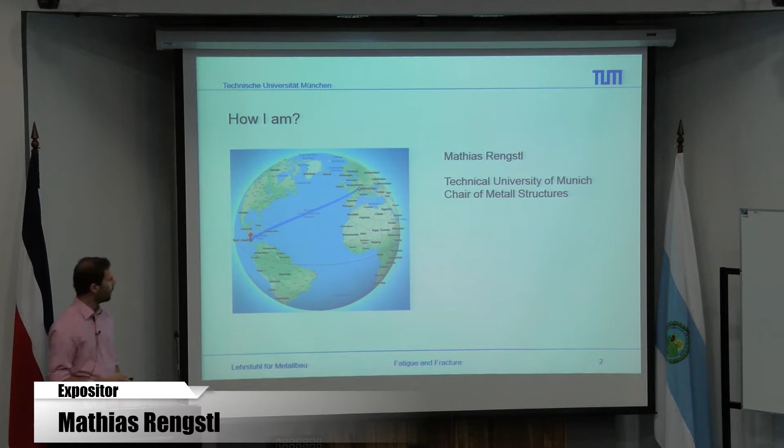So I had a short trip behind me. And also thank you for having me here and arranging this program, and to do a little bit more on this topic. So this is our chair of metal structures. This is our professor Martin Mensinger, who allowed me to come here. And just to give a short overview of our topics, what we are doing at our department or our chair is...

At first there are some guys who are working on blast analysis, so just design and numerical simulations, no experimental investigations. Then we have a topic on the buckling analysis of bridge girders and composite structures under fire loading, fatigue analysis of joints with aluminum alloys and steel, and also fracture analysis of steel, especially here for rail systems. Regarding the railways, if they're going brittle in summer or winter or in spring, so to enhance the system and the durability of the railway system in Germany.

So what I will do the next days is, as I talked to Esteban, we are doing in the morning some introduction always to one topic, more theoretical. And in the second session, I would go for an example, and there I would work on this example. So for today, we have the topic Introduction to Fatigue Analysis.

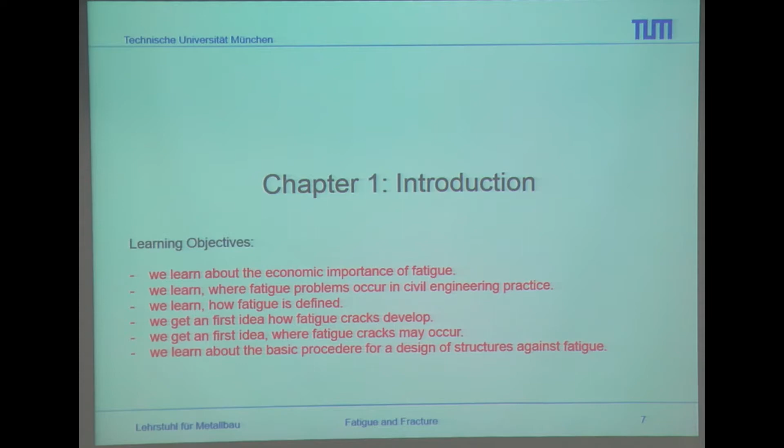Then we learn about the fatigue problems which occur in civil engineering practice. Then also how fatigue is defined. So what are the specific parameters, what are the specific names we have to learn, and what are the first ideas for the fatigue crack occurrence, and also some basic procedure for design of structures against fatigue.

So, so what does fatigue mean?

So fatigue is always referred to a time series, a stress time series, which is quite variable. In basic assumptions, as in testing, we always go there with a sinus, but reality always has something like this. So we have here a strain or a stress, and this stress or strain varies during time.

Due to the fatigue, the material loses resistance due to the frequently changing load. Therefore, we have relevant fatigue stresses - they are somehow the peaks from here to here, defined by the range of the stress and the number of cycles.

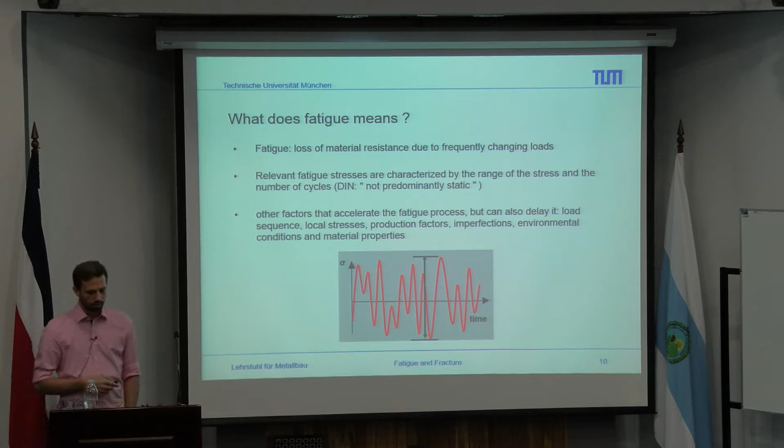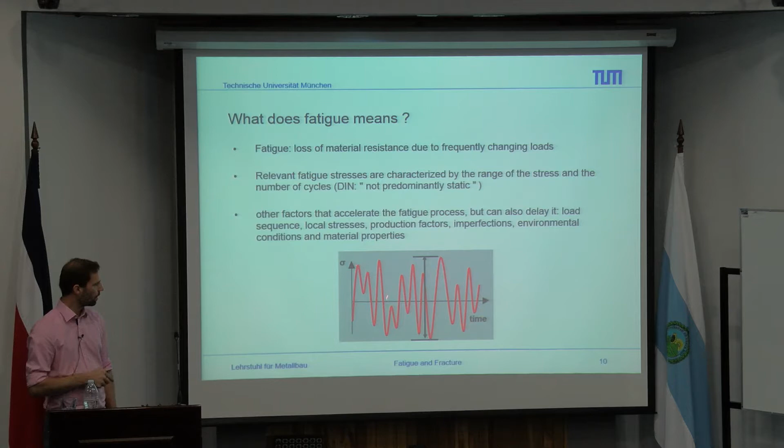There are some parameters or environmental effects which can also act on our fatigue behavior, such as the load sequence - do we have some high peak and some low peak, and again some high peak, and afterwards some low and high and low peak. Due to the arrangement of the high peaks and the lower peaks, there can be some effects on the material, and also on the local stresses.

So how is the constructive design of the structure? How is the building or the structure designed? Then also some production factors which are more related to welded parts and screws and so on. And then the next part, which we as engineers usually do not have in mind, are the imperfections.

Usually we always talk about some idealized beams and plate systems, but due to some second order stress effects from the welded part or the joints, we have there some influences due to the imperfections. And then also the environmental conditions and material properties.

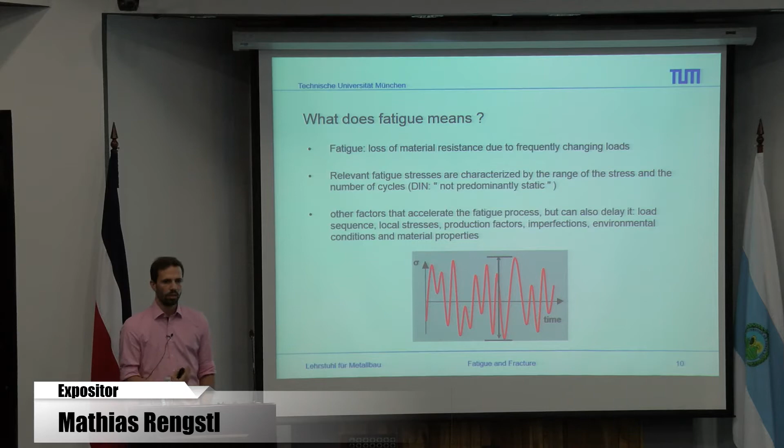Usually in fatigue analysis regarding civil engineering, in European standard we say that we do not work in the maritime area, because due to the salty water there is much more corrosion, and therefore you have to conduct more specific testing, which is usually not important for civil engineering structures in this case.

The fatigue history in Europe: the first observed documentation of fatigue damages was by William Albert in 1829. So now we have around 180 years of knowing this effect.

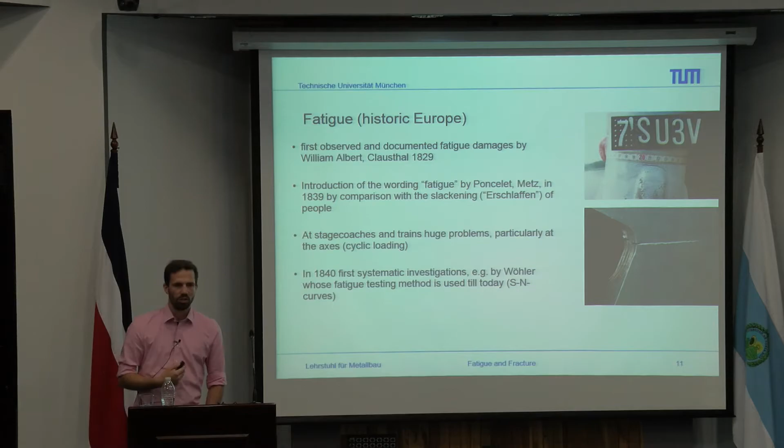Around 10 years later, by Poncelet, Metz, the word fatigue was established, and he established it due to the behavior of persons - if a person is getting tired, he also has some fatigue problem. So he mentioned that the material gets tired too, and established the word fatigue in this situation.

At this time in Europe we had the Industrial Revolution, and a lot of train systems were established. Due to this, the first real problems appeared at trains, particularly on the axes - the axes always rotate, the train system is not perfectly straight, and so you get a lot of different cyclic loading. Due to this, the first real problems appeared.

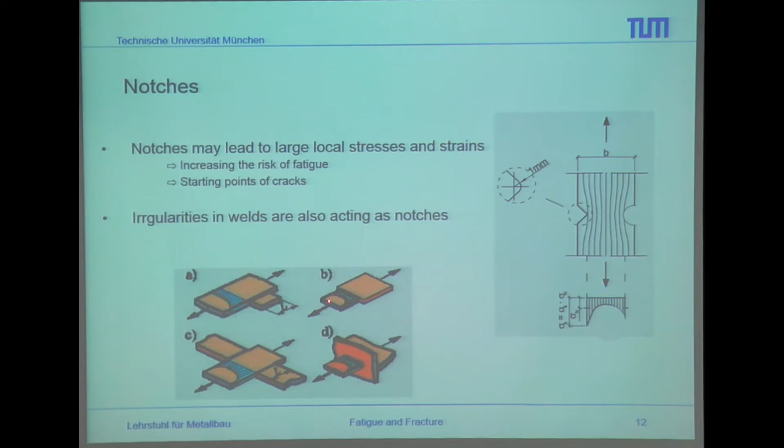The next one is a smooth tension bar, where we join different bars with different thicknesses. We have an increase of stresses from this point to this point, and due to this, the stresses at this point are also increasing, so we get crack occurrence and eventually our structure fails.

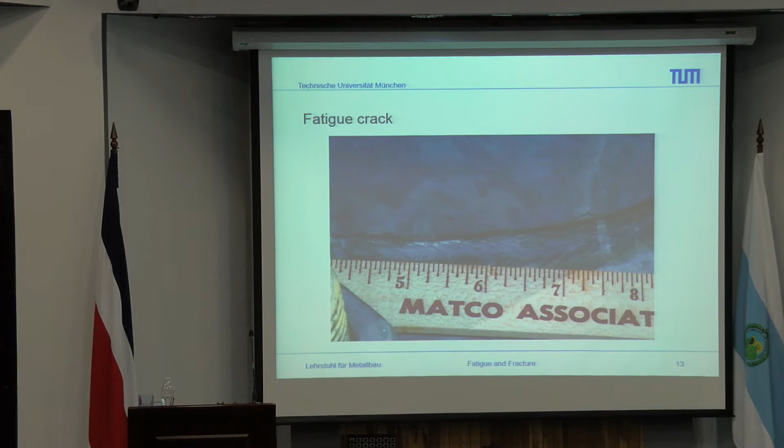So how does it look like? This, for example, is a section which looks like this, some hollow section, and we are now looking at these points, and here our fracture occurs.

Here we can see that due to our welded part, at the root and weld toe of our weld seam, we have crack occurrence, also due to the notches here. As we can see, the weld seam itself is not really large, but we can already see our cracks here.

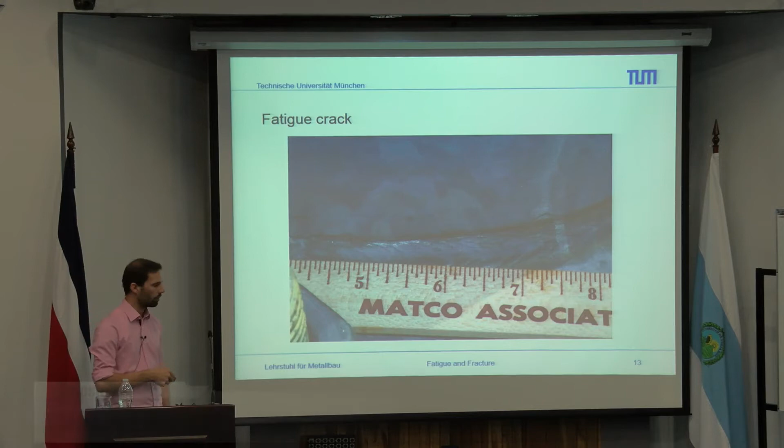This is something which can be tested with NDT testing procedures. At the end, you can already see such a crack of a size of 0.5 millimeters if you are really looking at the right positions, so you already can see where a crack might be, and how large the crack can be.

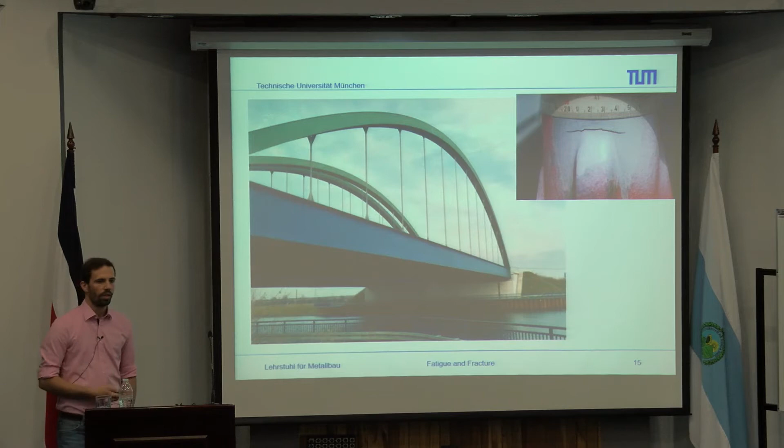So what are some specific parameters in a welded construction? Here we talk about weld imperfections, but we also have to divide between weld imperfections inside the weld and weld imperfections acting on the joint.

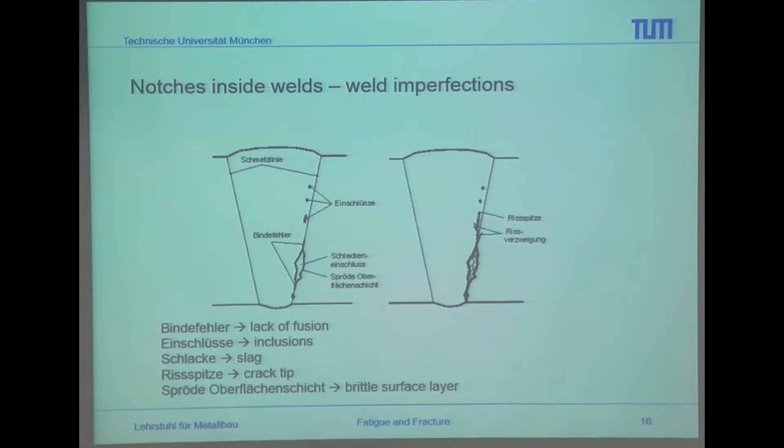Weld imperfections acting on the joint as a stress increase would be a misalignment, like angular or axial misalignment. So this means we have a joint, and this would be an axial misalignment, and this would be an angular misalignment.

I'm going to go specifically into these two effects tomorrow. But today, at first, we just look inside the material, so we are talking about the notches inside the welds and also the weld imperfections.

Here you have a short drawing. This is, for example, a butt weld, and there are some effects which I have named both in German and in English, due to the lecture being given in German. We have at this point a lack of fusion, so as you can see, there is a loss of material, meaning there is no joint between the base material and the weld material.

The next one is some inclusions, called Einschlüsse in German. The inclusions are some material which is in a really bad condition, which may occur due to the welding process, due to some bad welding parts. The next one is also the slags, which can also appear next to the lack of fusion.

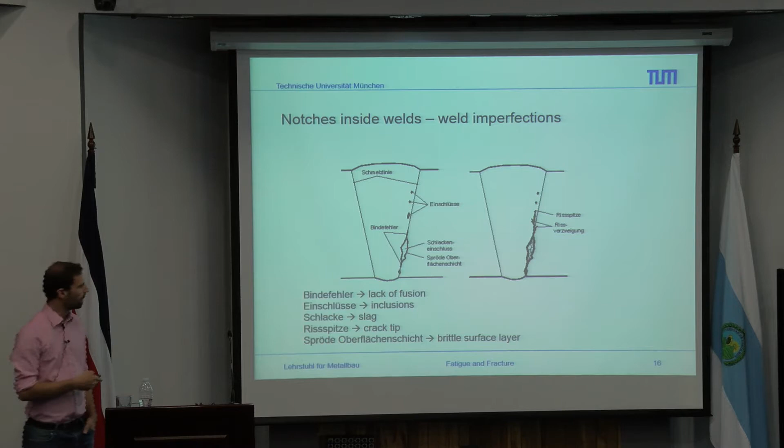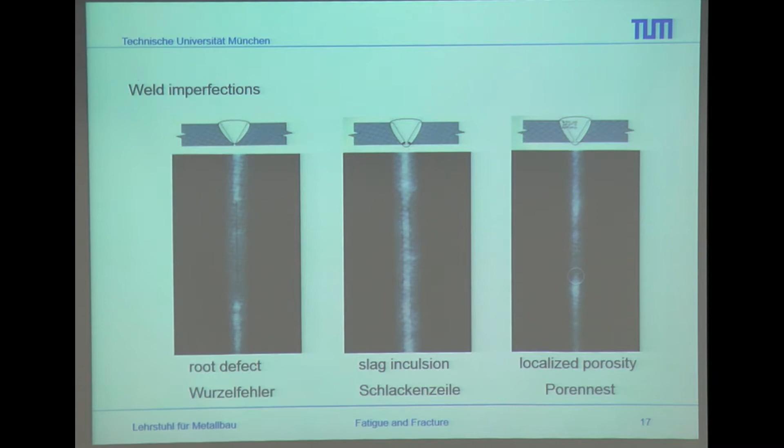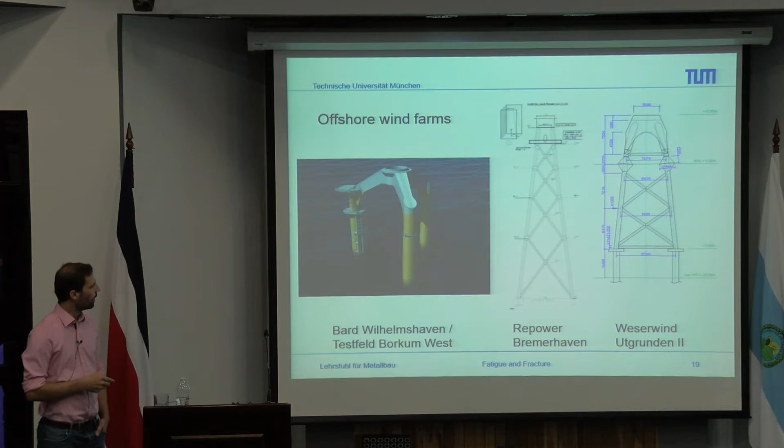So where can it appear? Just some introduction again, what are we talking about. In wind farms or offshore wind farms, we have a high amount of cyclic loading due to the wind turbine. It is rotating, the wind has some turbulences, and also the water is rough, so at the end we have a lot of cyclic loading which is really changing a lot. Due to this, here we have some analysis we have to do. There are just some drawings of how it looks like and how such an analysis is done in the industry.

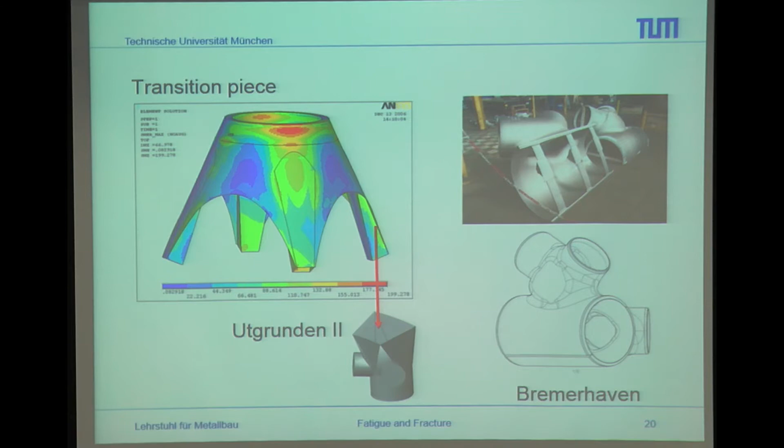So here we have the top point, which is this part here. This part is analyzed by a 3D model, and at the end you're gonna see how much loaded your static design is, but also your static fatigue design. This is also something I'm gonna go into in more detail tomorrow.

So which stages of fatigue processes can appear? The fatigue process usually involves crack initiation, crack growth, and residual fracture - these are the three main parts. The crack initiation is usually caused by structural changes of damages exclusively on microscale, so here we're really talking about microscale material defects and so on.

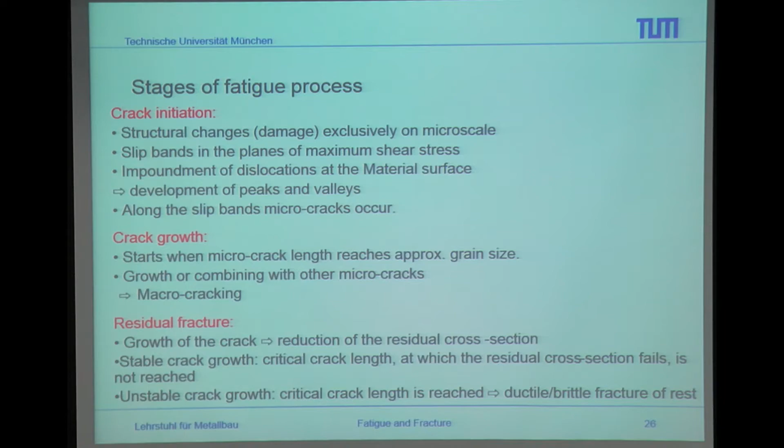And the next one is the slip bands, which occur mostly in the planes of the maximum shear stresses. This is something, if you're testing steel bars in a laboratory tension test, you can also see the slip bands. And also the accumulation of dislocations at the material surface, so the development of peaks and valleys, and along the slip band, micro cracks occur.

So here you can see you have some defects in the micro scale area, and due to the loading which occurs to the slip band, also the deformation starts, and this deformation is where the micro crack starts - this is the initiation of the crack.

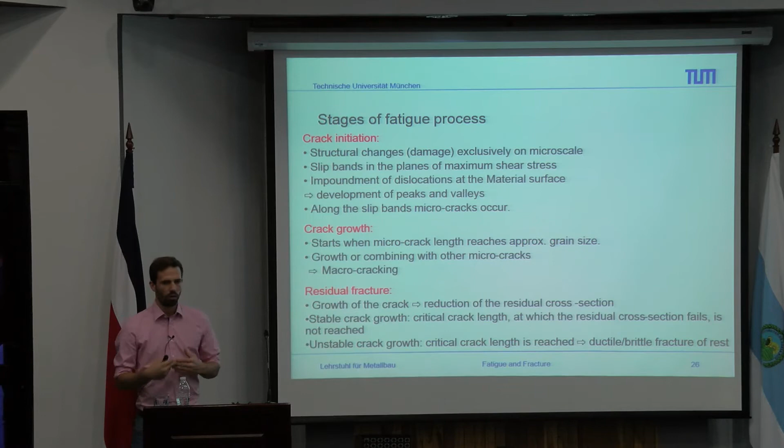Then our crack starts to grow when the microcrack reaches distances approximately the grain size. Due to the materials, you usually have different grain sizes, so at this level you cannot say exactly where the crack growth starts.

Usually you say you're talking about long cracks if the crack has a distance of 0.2 millimeters, 0.5 millimeters, because then you can also see this crack in the inspection. But before that, there's no way to see it, and so this level is somehow related to the crack size or the size of the grains, because then the first slip between the grains is broken or already cracked, and the crack growth has started.

At this level, you have the first grains which are broken, and at the end some different cracks may combine with other microcracks and then grow into a macrocrack. The macrocrack is, as I said before, at the end the long crack, which you can obviously see in some inspection, and at that level you can go for some enhanced investigations.

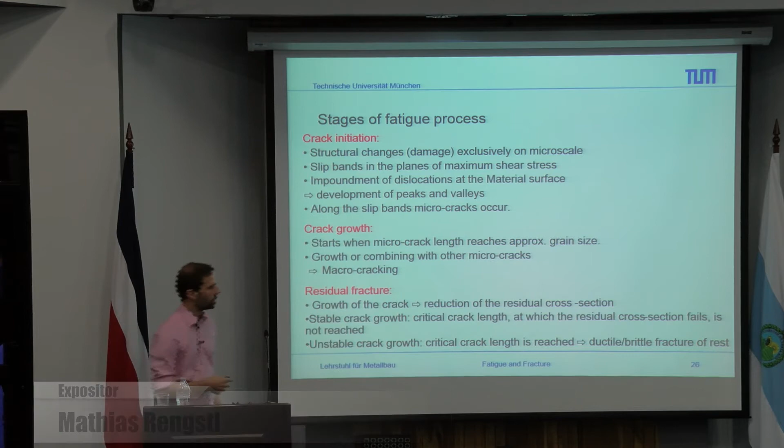So the residual fracture is the growth of the crack, and also at this point the reduction of the cross section. So what happens is we have here our crack, for example, with this loading.

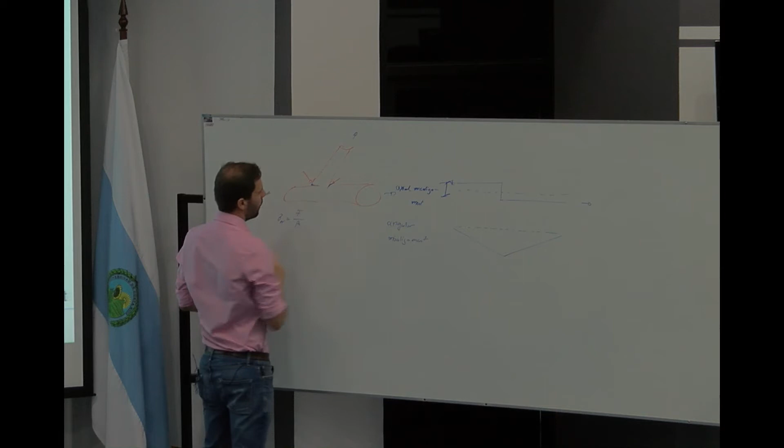Usually in your static design you would mention sigma n, so the nominal stress is F over A, and our crack at this part is going into the structure, so you have here some reduced section, and so also the nominal stresses, and at the end your static design is also influenced by the crack occurrence.

So in some later stage, you have unstable crack growth, meaning the crack grows faster and the structure will fail rapidly. This is where we talk about ductile and brittle fracture, and this is something the codes try to investigate, to find the maximum crack length at which the crack leads to failure of the structure. This way engineers can determine the maximum level of crack occurrence, and at that point you have to change your structure, maintain it, or find another solution.

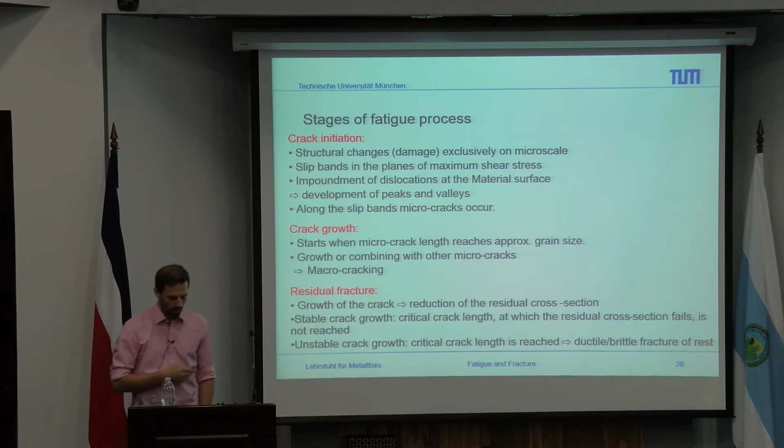So what are the stages of the fatigue process, as I already mentioned: we have stress cycles, and due to the stress cycles there occur some local plastic strains. These local plastic strains are related to microcracks, which form into main cracks—this is the combination of microcracks forming larger cracks. Then we have development of cracks, reduction of area, and at the end, failure. In the material itself, it looks like this.

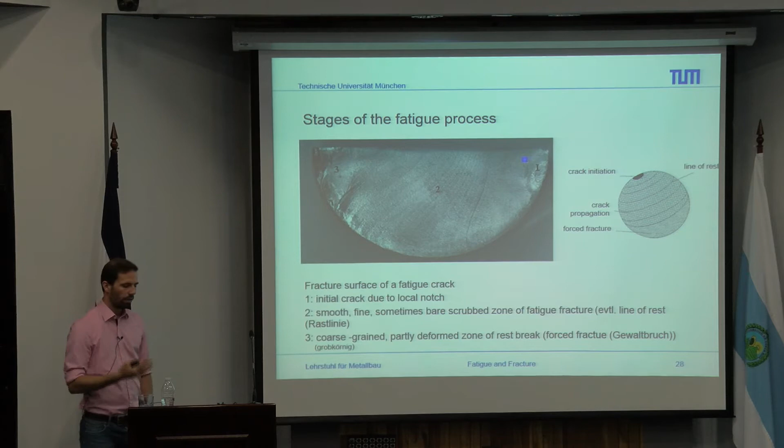So what are the stages of the fatigue process again, but from the view of what I can observe on the specimen tested in the laboratory? Testing in the laboratory usually looks like this—this is a round bar, done with normal fatigue testing using sinus loading. You can see here the crack initiation, a small part where you have local deformations or failure in the material. Due to this failure, you get the first cracks, and at the end you have crack propagation.

The crack propagation has smooth, fine, sometimes bare scrubbed zones of fatigue fracture. In this zone, at the end, you can see lines of rest—these are the darker lines. Even with sinusoidal loading, the crack occurrence or propagation is not continuous; you always have lines where the grain structure shows some resistance, creating these lines of rest, so the crack doesn't grow as fast there.

And afterward, once this resistance is broken again, the crack propagation starts again, and another rest line occurs. As you can see here, the surface is quite smooth and fine-looking. And at the end, you have the forced fracture—the final fracture of the round bar—which looks more hilly, like a mountain structure.

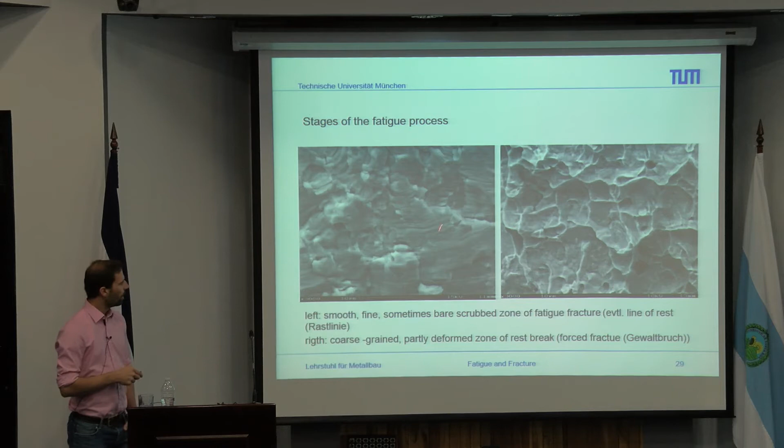How does it look under the microscope? In the microscope you can see the crack propagation, with some small lines—this is the crack propagation, as you can see here.

And the forced fracture is the more hilly part. So this is really the part where at the end the structure fails, and also the coarse grain is going to be brittle.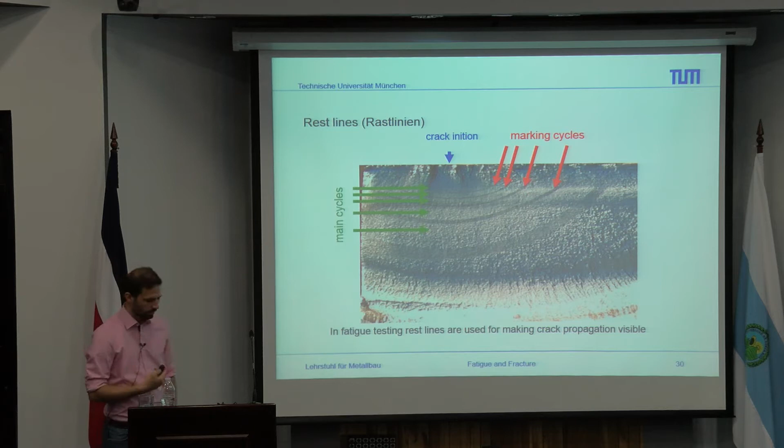So this is usually how it looks like, and then some stable crack growth, so how our crack is going from the specimen from the outside. So here, this is the border, the surface of our specimen, and of course the crack grows from this part into our specimen. And here you can see, okay, this crack is not straight.

It always is some lines, but the crack is moving due to the grain structure and due to the microscale system inside the material.

So then a more theoretic part to know about, okay, what is the problem in the microstructures due to the crack initiation. So the crack initiation is always something of the, I would say, a more material related part, and which is for engineers not as interesting or not as important, but we have to know about the problems there, and also about some effects which are related to this problem, to have also the quality procedure in our structures.

Or due to our processing, where we establish our structure, where we do our welding parts, where we fit our screws, and so on. So what is the main idea here?

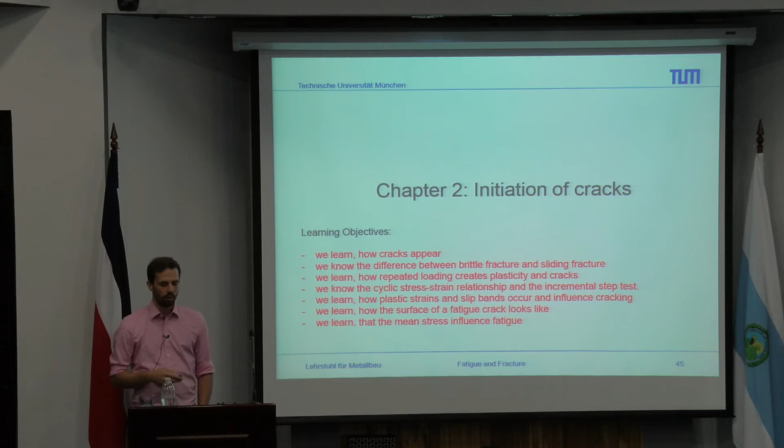And the last part, which we're going to focus here, is the mean stress influence on the fatigue. So just a short view, what is the mean stress and how is the mean stress related to different materials.

So the fatigue of metal structures. I think everybody knows about our paperclip effect. So usually if you're sitting at the chair or somewhere in the office, you're thinking and you're going to play with the paperclip, and during your playing with the paperclip, usually somehow it's going to fail in two parts, and this is, I think, the fatigue problem everybody knows from daily life.

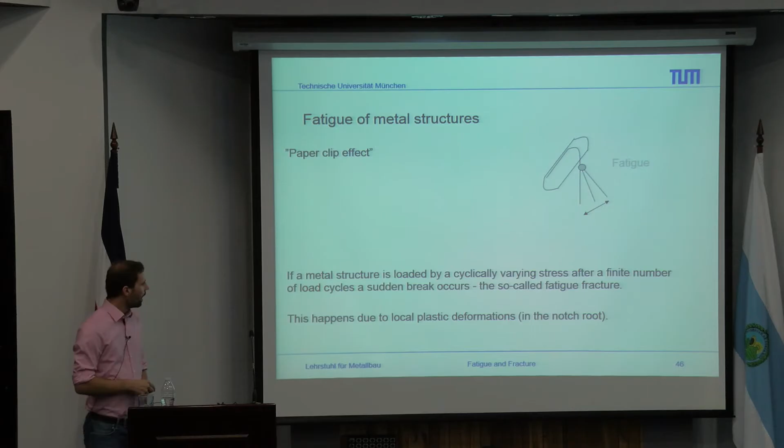And in our structure or in the material, there is in some related part the same effect happening. And so we have there a cyclic varying stress, and after a finite number, so this is the numbers you're going to twist around, the paperclip somehow fails. And this is the so-called fatigue fracture.

And of course, in this situation, we have a really ductile material, and so this ductile material also gets a lot of plastic deformation, and this plastic deformation is always really local. So, for example, in this part, this local plasticity occurs somewhere here, and so due to this, at this local part which gets or is influenced by the plastic deformation, at the end the crack occurs.

So what is the fatigue loading? The fatigue loading, an engineering part, is somehow a little bit different, because we do not obviously induce plastic deformations in our structure. So we have here our stress-strain curve of a metal sheet, for example, and so we have here our yielding strength and here are the ultimate strength.

So, and the cyclic loading, which we're talking about here in fatigue design, is always below the yielding point. But due to the numbers of cycling, which we apply on the structure, also the crack gonna appear. And so we have some endurance problem at the end, which occurs due to the size of the loading, so of our stress range, and also due to the numbers of cycles we're going to apply on our structure.

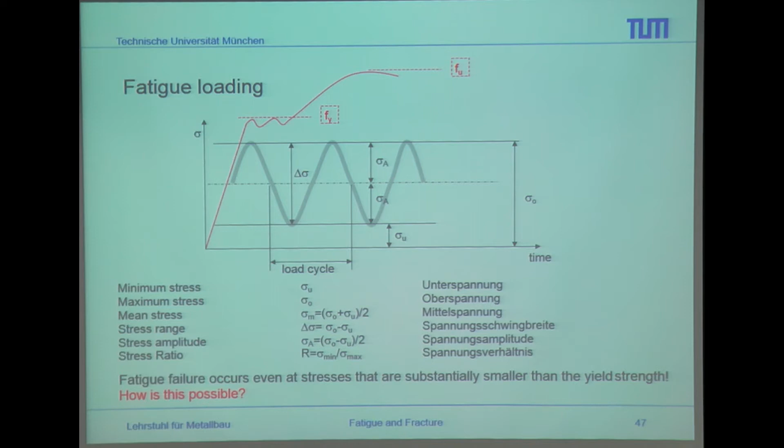So we have to introduce the stress ratio, because the stress ratio is always the parameter we talk about in fatigue design. We do not talk about the mean value, we talk about the stress ratio, because it gives more information on the behavior due to the structure and the loading which occurs due to dead weights and so on. The stress ratio is always defined as the minimum value divided by the maximum value. So this is the box we're talking about inside fatigue design.

If you go to the microscopic background of our material or fracture, we always think about repulsion and attraction of the atoms and the nucleus. The fracture is always a separation of the material. The material is made of atoms, and at the end also ions, which are positive or negative. The repulsion is the electromagnetic force between two positive nuclei, and the attraction is the electromagnetic binding between the two atoms. When fracture occurs, there is a force which is related to the binding force.

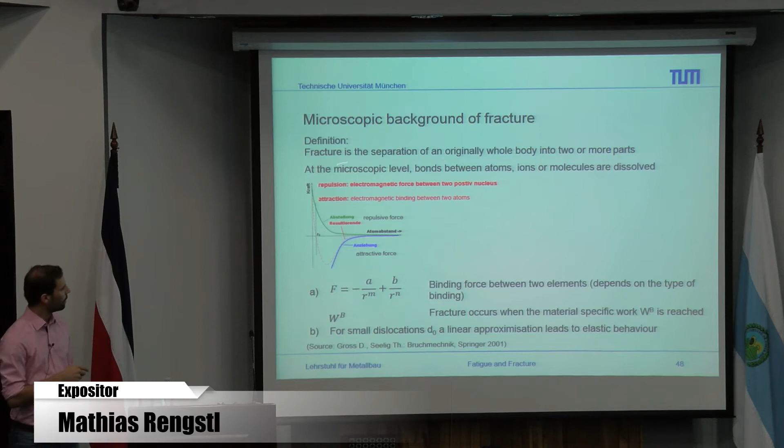The binding force is related to the atomic radius, so this is Rm, and due to Rm we can formulate, based on the distances of the atoms, a fracture-specific material work related to the fracture occurrence. This is schematically shown here: we have the atomic radius, and with higher distance of the atomic radius, both the attraction force and the repulsive force are reduced.

If you go into the structure, we always have small dislocations. Dislocations in the atomic structure mean there is a part which is not in the regular order. Due to this, we have a dislocation d0, which leads to an approximately linear behavior. So this is always the background we talk about in fracture of the microstructure.

So how does it look like? Due to the fact that fracture only influences the crystal lattice close to the new surface, the work of the binding forces WB can be interpreted as a surface energy. This is a nice sentence which we always have to combine a bit more for the students.

For example, we have our stresses, and the stress is always acting on our microstructure. These are the stresses which work on the dislocations and also on the attraction of the atoms. Due to the fracture, we have a crystal lattice, and this crystal lattice is always close to the new surface. This means that if the crack occurs, some atomic binding breaks, and at the end we have a new surface, and due to the new surface we have a new fracture energy related to the situation.

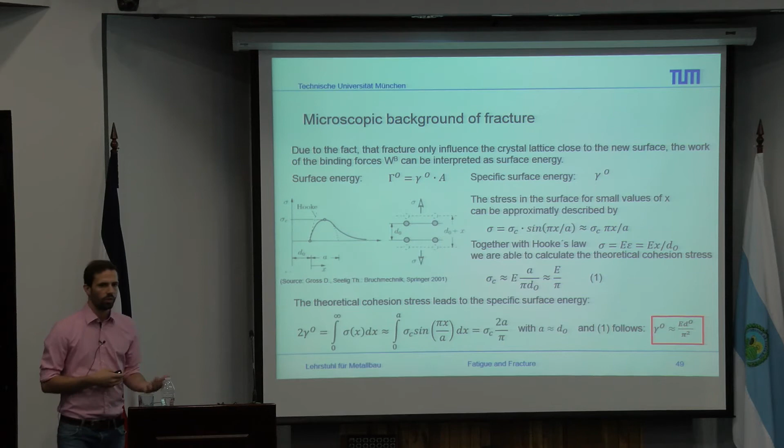This can be formulated by these formulas. At the end, due to Hooke's law, which is a law working in engineering for linear elastic behavior, we can formulate our sigma c, and due to sigma c we can also formulate a fracture energy related to the atomic structure. For this we have some specific values, and as we know already, the modulus of elasticity is about 10 to the 5 MPa.

Then we can measure in laboratories the distance between the atoms, defined here as 2.5 times 10 to the minus 10 meters. We also get a sigma c, which is related to the binding force between the two atoms, and a stress value showing the work between the atoms. Therefore we can formulate an energy formulation, and this energy formulation leads to the work we can apply on our microstructure. This is the smallest theory related to the occurrence of crack initiation in the microstructure.

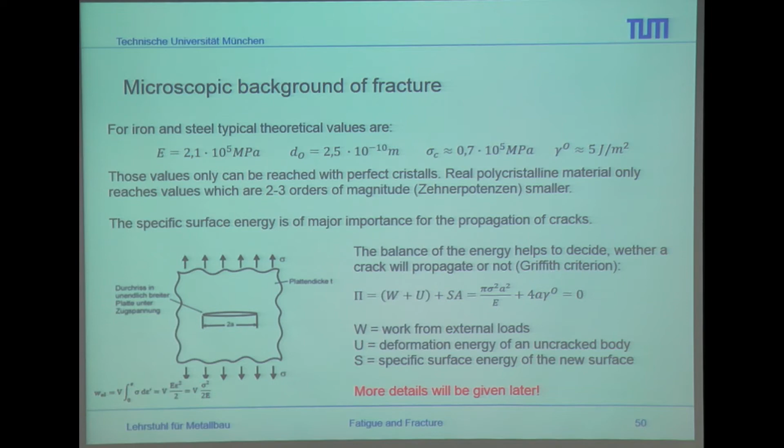As you can see, this model is also used for large scales. For example, if we think about a plate, and at the plate we have a failure, this failure grows to both sides. We use the model with the plate and the crack through the plate, and this model also works for the small microstructure. So at this point we can go and say, okay, which defects of polycrystal material we're going to talk about.

So these are the regularities of material in mesoscale. We have some polycrystalline material, and this polycrystalline material consists of crystal boundaries connected to the crystal. The orientation of the crystals in space is irregular and causes some anisotropic behavior in the material. But at the end, for engineers, in engineering behavior, we always talk about an isotropic material. This is something really related to the microstructure.

At the crystal boundaries, some precipitations can be found. Due to the loading of the microstructure, a change in the atomic order or in the microstructure occurs, which at the end has some influence on crack initiation and also on crack growth. This is more related to material behavior in the structure, and there's more interest in material science. Also the cavities and microstructure from fabrication exist.

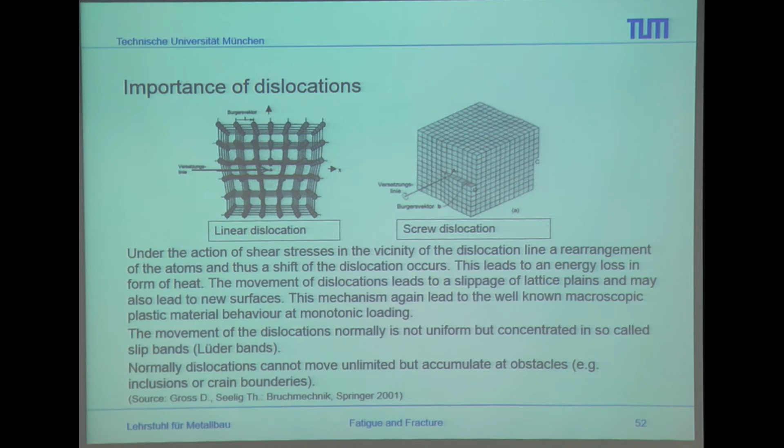Due to the loss of surface energy, we also get some new surfaces inside the microstructure due to crack occurrence, or due to microcracks. This also, as I said before, leads to a mechanism, to a well-known macroscopic plastic material behavior under monotonic loading. This behavior of the dislocations and also the rearrangement of the slip bands is so-called...

We also know from the tension test, this concentrator is so-called the slip bands, which are also known as the Lüders bands. The Lüders bands are something that, if you go in the laboratory and do a tension test for steel, for example, you can also see these Lüders bands, because they're always somehow in a ductile material at an angle of 45 degrees due to the tension force. At this part, the Lüders bands act as the shear forces which are acting on the dislocations.

This is just, I'm going to show later, a small movie of a tension test where you can see how the Lüders bands appear and how they're built in the material.

So now I gave a small introduction just to get into the thinking of what is going to appear in the microstructure. Now we're going to talk about the development of cracks and also brittle fracture.

Due to different material behavior or different material structures, different cracks can appear. These are called transcrystalline cracks or fractures, and these transcrystalline fractures go through the crystallines of the material. On the other side, there are intercrystalline fractures, which always go along the boundary of our crystallines, and at the end work differently in our structure. So the statement is: in the case of a crack going through several grains, the orientation of the crack surface depends on the local orientation of the crystals.

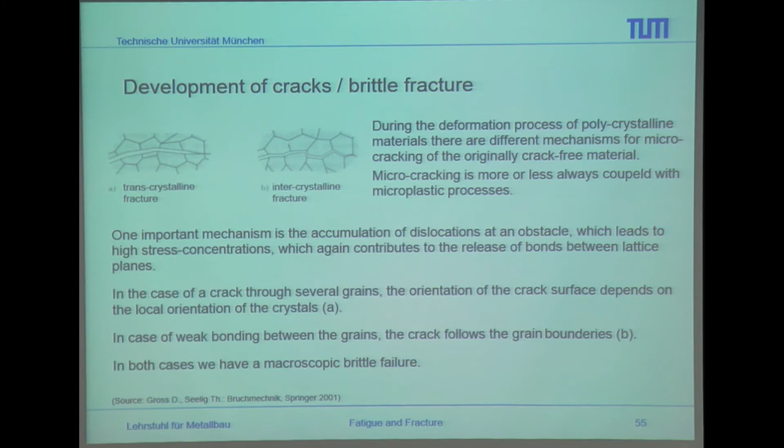So as we can see here, we have the orientation, and it goes more straight. At this part, we have not a straight line, so it is more curvy. At this point, the boundaries and the orientation of the boundaries are more influencing.

So how does a brittle fracture look like? A brittle fracture looks a little bit the same as the forced fracture we had before, but here we have some small deformations and just slight constrictions. This is something we usually talk about for low temperatures, since at low temperatures the material is not as ductile as at normal or high temperature, and due to this, the brittle fracture occurs.

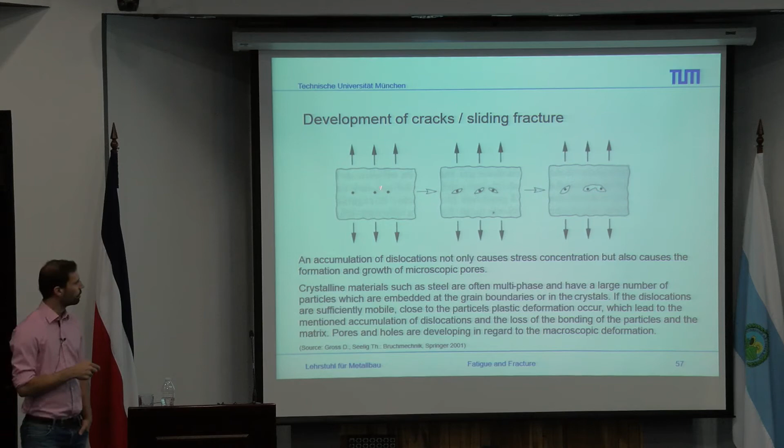So this is the development of the cracks. As I already said, we have the interaction of some small cracks. Due to these small cracks, which can be a pore or a defect in the material, we also get some acting on the material around. This small pore or defect at the end grows to both sides, and at the end we get some combination. This is how the crack initiation starts. So we always have some small parts which have a material defect, and at the end we get some bigger cracks.

So this is if we go now to higher loadings. As I said before, we have a mean value of our stresses, and also the mean value is influencing our crack occurrence. If you go, for example, to higher stresses, we always have here our slipping bands, our Lüders bands.

Due to these slipping bands, which occur due to the loading, at the end we get, in an easy way, some rough surfaces. Due to the rough surfaces with the peaks and valleys, we at the end have the occurrence of the sliding process, and this leads at the end to the extrusion, the peak, and the intrusion at the material or at the surfaces. This leads at the end to the surface crack, which can just appear at this side.

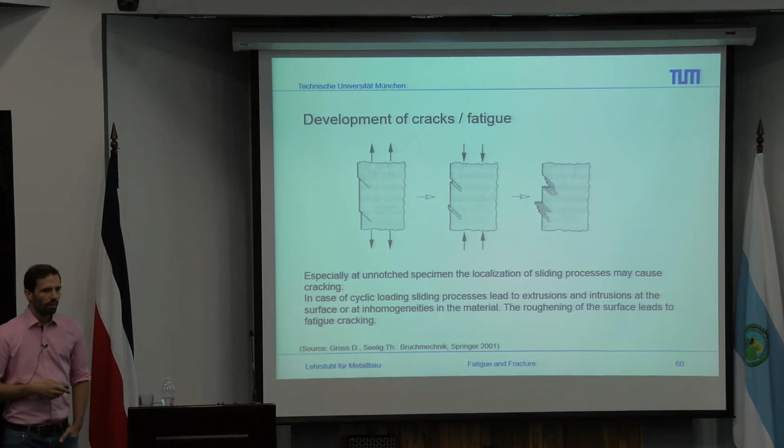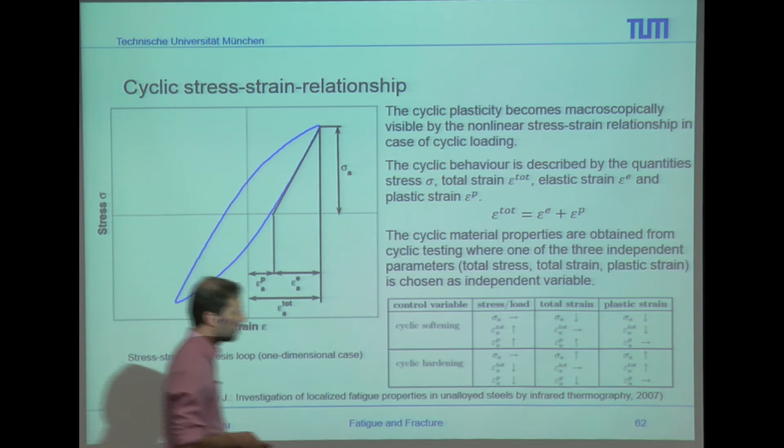So, due to some specific task we were also talking about in advance, we have also added here this cyclic stress-strain relationship. This is something you usually know about from the tension test, and in the tension test you usually have a material behavior like this.

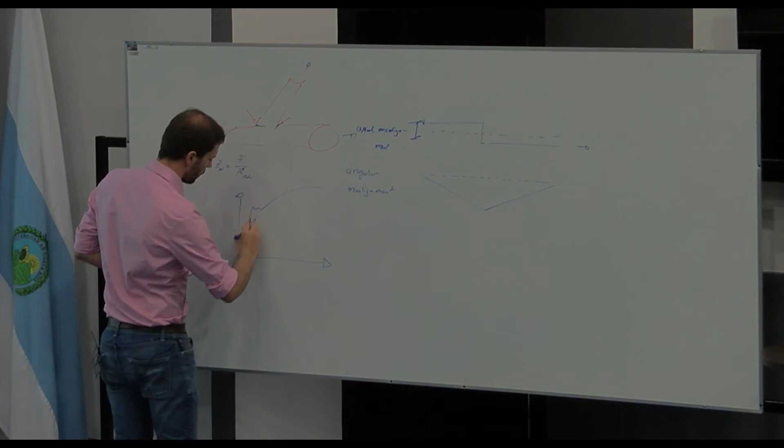If we now go for a cyclic material behavior, we would say that due to the material laws, our structure is loading and unloading due to the modulus of elasticity. But due to the local plasticity, also some different effects occur, and these effects can be like this.

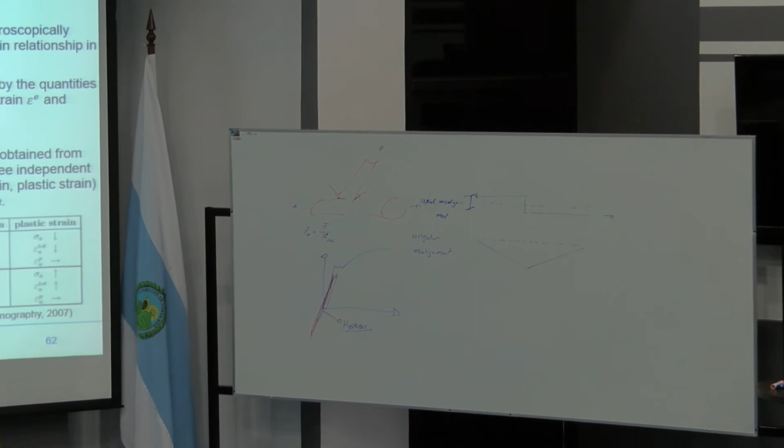So we get here some hysteresis, and the hysteresis is usually the part you think about if you go for earthquake design. This is the part which also handles at the end the energy loss in your material or in your structure.

This is always related to the cyclic stress-strain relationship, and this cyclic stress-strain relationship involves some plastic deformation, which might be macroscopically visible as the nonlinear stress-strain relationship in the case of cyclic loading. This also means that in this behavior we always have a plastic part and an elastic part. The elastic part always goes, as explained, due to the modulus of elasticity, and the plastic part at the end takes the energy which is applied to the structure, and at the end is also somehow related to damage in the material.

And due to the behavior, this is related to the material itself. It can be different for each material, for example for aluminum alloys or for titanium alloys, or also for different steel materials. You can have a cyclic softening or a cyclic hardening.

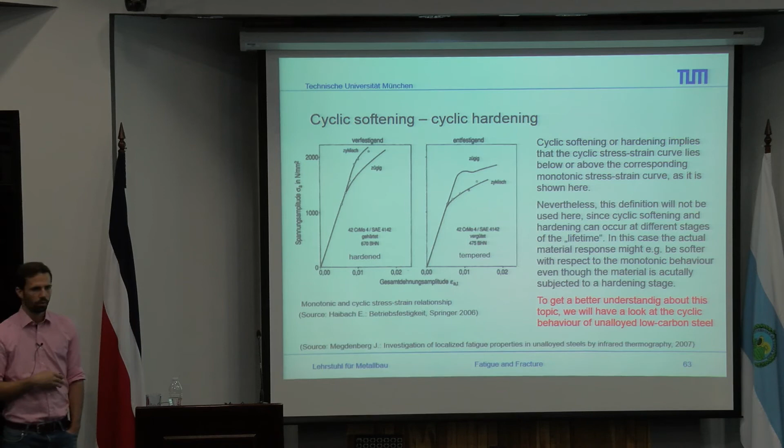These effects usually appear at the first thousand numbers of cycles, and it's much more related to high stresses or high applied values of forces due to the structure. So how can you test this in the laboratory?

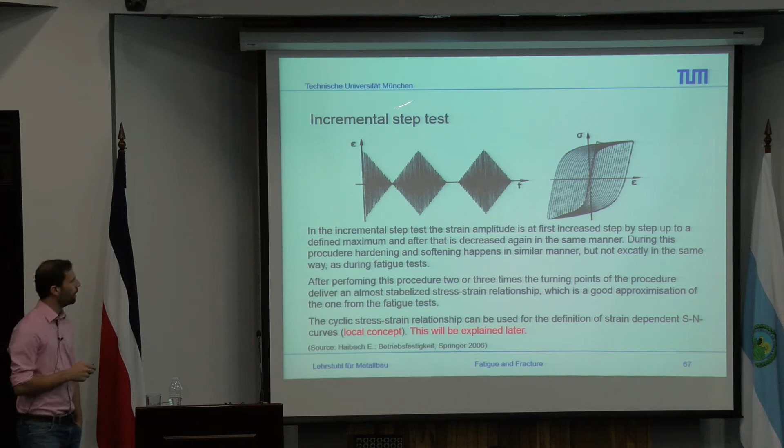This testing procedure is somehow related to the incremental step test, and this is just one procedure out of three. If you separate the applying of the loads and the testing procedure, at the end you can talk about 9 different incremental step tests you can conduct on your material. But how is it going to be done?

Usually the incremental step test is defined by cyclic loading, which looks more like a triangle or rectangular shape. You start with plastic deformation in the tension test, then decrease your loading and increase it again, and so on. Due to this, you get a shape of the hysteresis which looks like this for the whole testing.

This part is a material which has no specific cyclic softening or hardening. If you would have cyclic hardening or cyclic softening, this point would move in this direction or that direction. So at this point, we talk about a completely stable cyclic material.

Due to the peaks, you can define the behavior of the material and the cyclic behavior, and the plastic deformation which can be handled by your material. This is applied more to local concepts, where you ask what is the real amount of energy in your structure, which also leads to damage inside your material and inside your joints. So how does the influence of load amplitudes on your cyclic material look like?

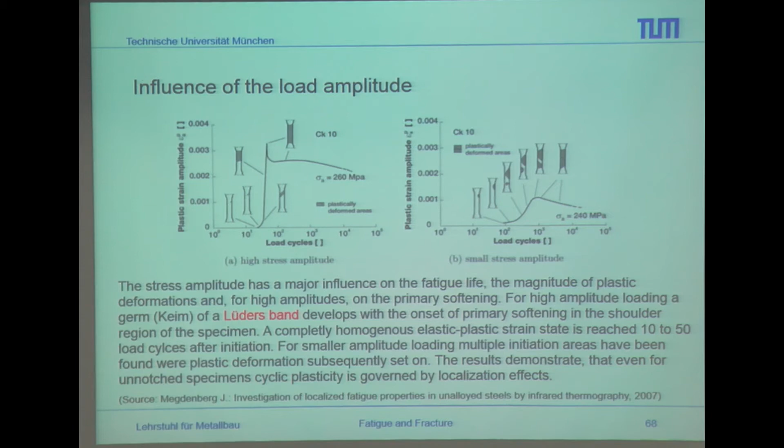Due to the loading, the first plastic deformations are always done at this part, and at the end you have an increase in the occurrence of plastic deformation. For the high stress amplitude and for the small stress amplitude, this effect occurs more later, I'd say. As you can see on the amount of cycles, the plastic deformation also occurs due to the change in the microstructure - this is a real local effect in the microstructure, but it occurs later.

If you think about your cyclic stress-strain relationship, you get some plastic deformations, and the plastic deformation at the end represents some information in the material which is still there. Due to this, you also get some mean stress information or mean strain information in the material, which increases with the amount of cycles.

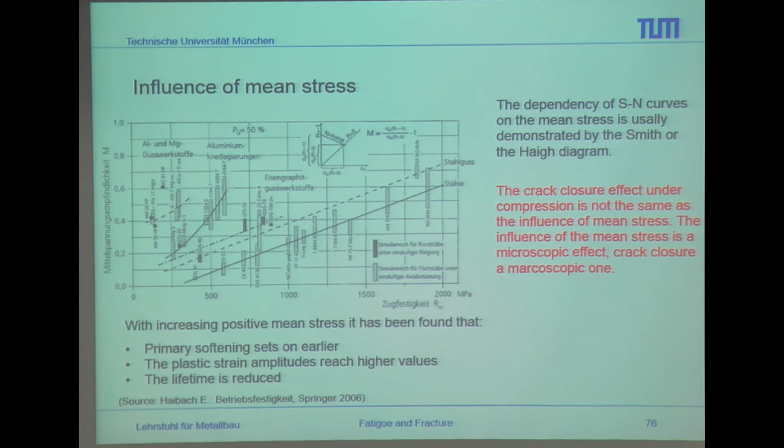You see here that the mean value effect is really low, but you can take this influence into your design, which I'm going to talk about tomorrow. At this part you have some small influence, which is really low. But for example, if you go for some other alloys like aluminum or cast materials, the effect increases much more.

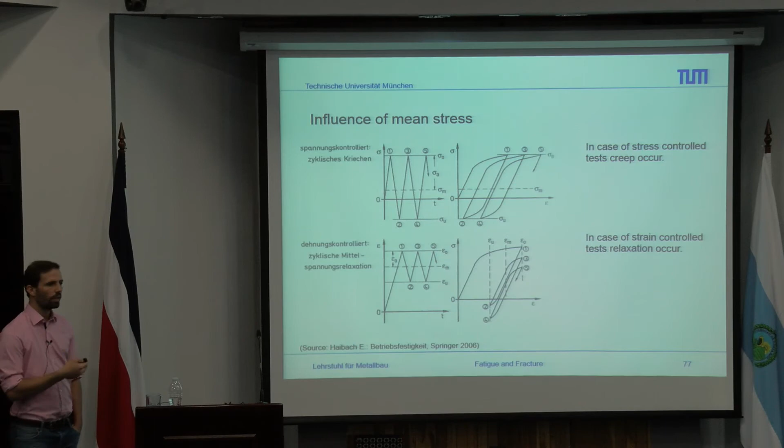And how does it look like? This is what I meant before. For a stable material, you have no influence. But for example, for a not cyclic stable material, which is load controlled, you see here you always reach the same level of loading, but due to the plastic deformation, the material shifts in this direction, and you get some mean strain information into your material.

If you go for strain-controlled testing, also done by incremental step testing, you always reach this point of strains, but due to the softening effect, the amount of stress in your structure, measured in your load cells, is going to be decreased.

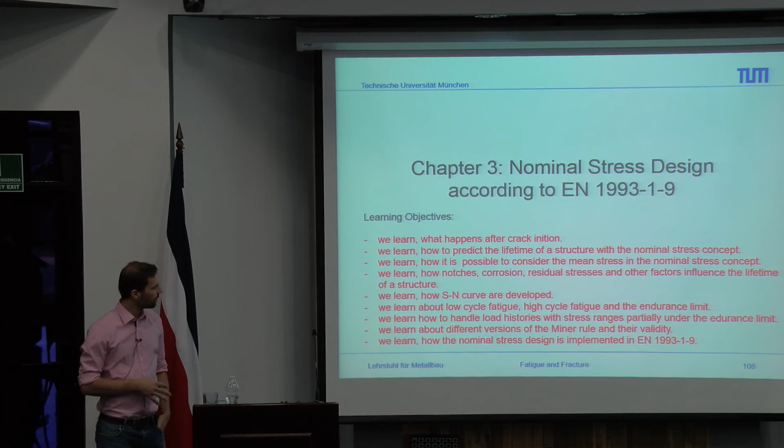So this part was done to give you information on which effects can occur in the material, and which effects lead to defects in the material. Now I want to shift from this material-specific information to our design information.

This is what we call the nominal stress design concept, which is here related to the Eurocode EC3, but the same concept you can also find in AASHTO. The concept itself is not strictly related to the code, because there may be different assumptions in the resistance curves, but the main thinking and the main concept remain the same.

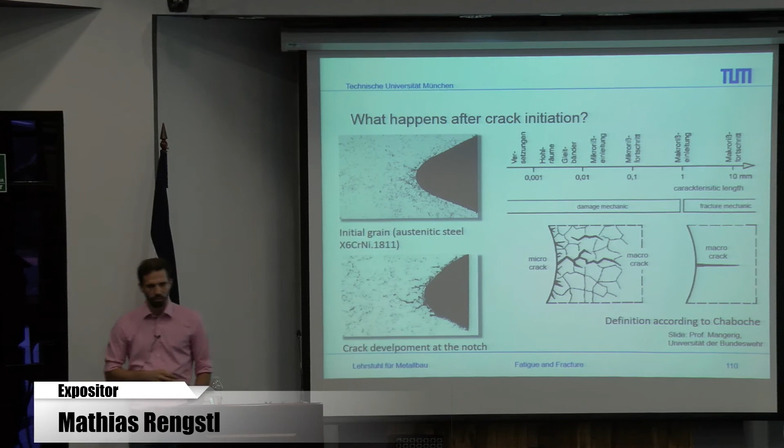And again, what effects can be handled by the concept itself? This information is more about what happens after the crack initiation.

For example, this is the characteristic length of your crack. For a small characteristic length, you have a real damage mechanism, more of a microscopic influence structure. After 1 millimeter, usually you say this is based more on fracture mechanics, and in the nominal stress concept, you want to apply a concept influenced by both parts.

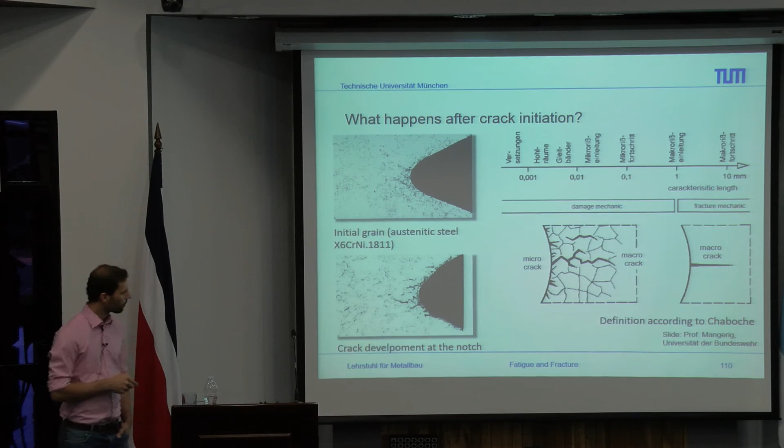At the end, if you test according to the nominal stress concept, you're always testing at the point of fracture or failing of your beam, your testing specimen, your joint. So this is what you're going to test there.

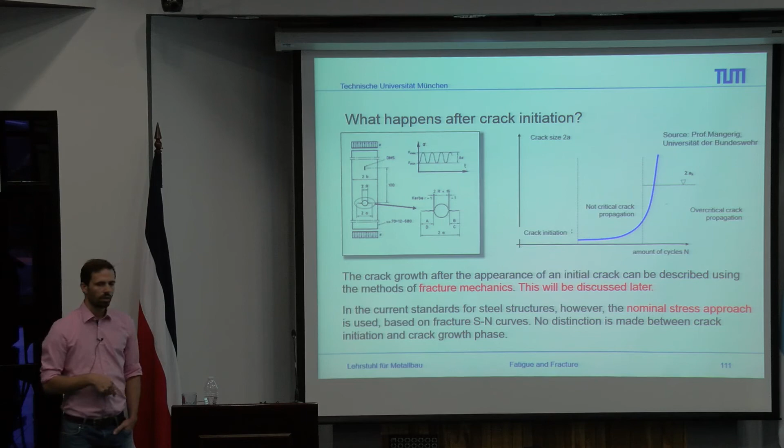So this means the amount of cycles we're going to apply there is always up to the fracture of the specimen, of the bar, of the joint. So, what is it, how is it going to be applied?

So we have, as I said already, a nominal stress concept. And the nominal stress concept, in the context of civil or structural engineering, is always related to a multi-stage load spectrum. Therefore, we're always talking about global stresses, which we are going to use for our calculations.

For example, we do some analysis on beam structures, and with this information and the recalculation of stresses due to the Bernoulli beam, we can estimate our stress ranges. In the resistance curves of the nominal stress concept, all information on local peaks due to notches, holes, and so on are already applied, due to the notch classes which you can find in the codes.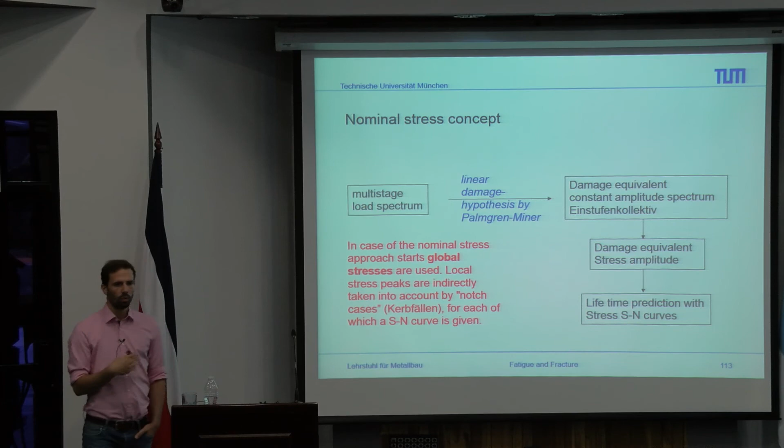For example, a stress range of 200 MPa and 240 MPa. At the end, due to the damage equivalent stress range, we recalculate a stress amplitude or stress range which has the same amount of damage inside your structure. With this information, at the end, we can also give some lifetime prediction based on the stress in the SN curves. So this is the procedure you usually go through for the nominal stress approach.

So again, what information do we need there? On this side, of course, we also need the stress ranges and also our R ratio, which is defined by the minimum peak to the maximum peak, and also, as I said before, the number of cycles.

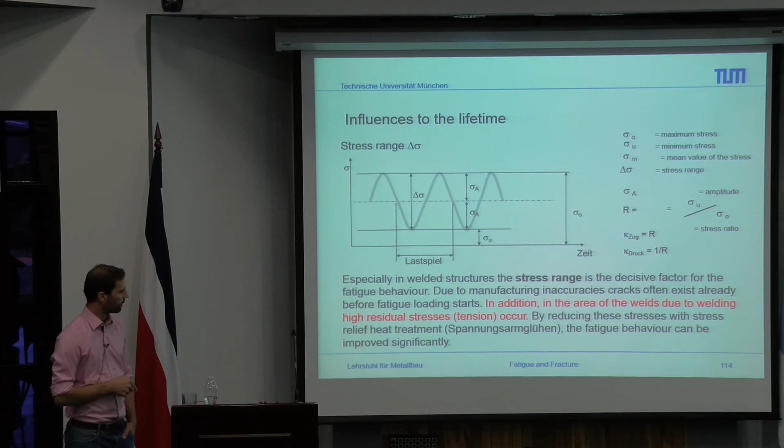So what is also the dependency of the curves on the mean stress? For example, the notch details, the details we're usually discussing in the nominal stress concept, are always related to the amount of 2 times 10^6 cycles, which is at this point. And as you can see here, due to the amount of cycles, here the 2 times 10^6...

...and the mean value, which is at this point related to the stress ratio, you can shift your resistance curve to higher or lower stress ranges, which is just influenced by the mean value. So if you go here and say, okay, you have a mean value which is 0, then you can handle a stress range of around 80 MPa.

And for example, if you go more to a tension-related behavior, so your mean value is shifting toward tension, then your stress amount or stress amplitude is going to be decreased. If you have, for example, a lowering of the mean value, your stress amount is going to be increased.

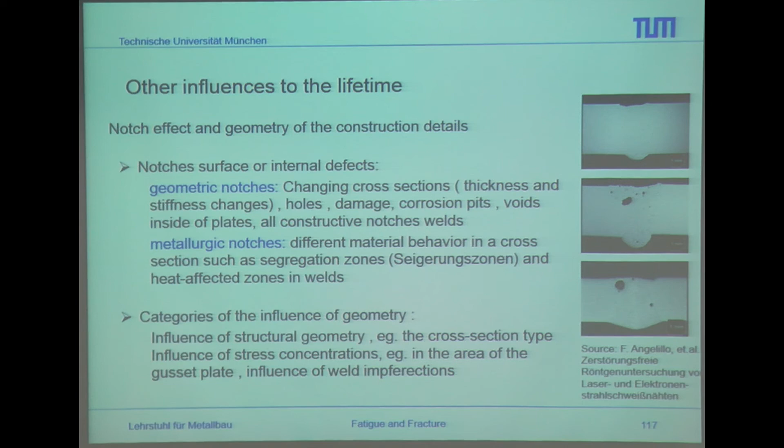And for this weld quality, you have to go for NDT or for the shape of the structure. At the end, this information conveys the defects, as well as the stress increase due to the shape of the weld seam, and also some imperfections. This is what I meant before: the structural imperfections on your structure, so there are regulations on how large an imperfection acting on your notch detail can be.

So again, with the geometric notches, you have to think about choosing the right notch details. For example, this is some specific parts which you can see here - this is something you're never going to find in the recommendations for notch details.

Because the notch details always talk about some straight bars, some straight plates. At the end, if you have parts in your constructive design where you have to decrease your structure, you have to think about how to build this detail and which detail would be best. For example, this would be a really bad design, because you have an increase of stresses here due to the sharp edges.

This part would be much better, because you have a more smooth definition of the opening hole, so you don't get as much stress increase, and therefore the stress concentration is not as big.

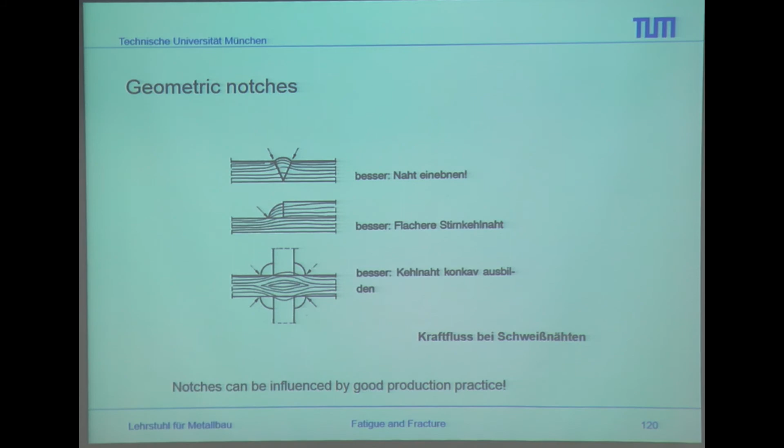So also for the weld seam, this is what I meant before. You have your classification procedures, and in the classification procedure you can see how you're going to build the weld seam and what are the parts of the weld seam. For example, the crack always tends to occur at this part here, at this part here, or at this part here. This is always related to the shape of the weld seam, and also due to the procedure of how you build it.

For example, some better quality would be to just take off the weld seam and make a flat bar. This could also improve your quality and give you some better resistance curve.

At this part, of course, you have a notch failure at the K-shape of the weld seam. These notch failures can lead to crack occurrence at this part, but also the weld seam here is quite huge.

If you have a smaller weld seam that can still handle the stress amount, then the stress increase due to the weld seam is smaller, and so the amount of cycles which you can handle is going to be increased.

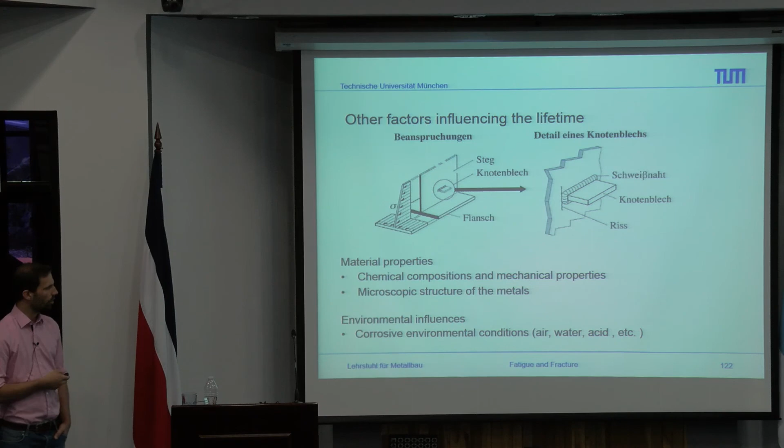So, which are the influencing factors? This is something I already went through somehow in the last pages. Of course, there's the strain, the stress which is loading your structure, but also the detail you're going to choose in your constructive design.

For example, you have here some bending moment. The bending moment also leads to a lower stress at this part. So this part is not as loaded, for example, as this part here.

Also, how you apply the structural detail matters - how you decide on your welding, but also the size of the plate you're going to add. For example, a short plate always leads to a bigger amount of stress increase. If you use a longer plate, the amount of stress increase is lower, and so the SN curve, or the number of cycles it can handle, is influenced.

So how does it look if we go now for the testing and stress dependency? For example, we have here our specific plate we want to investigate, and at this part we want to define a curve like this.

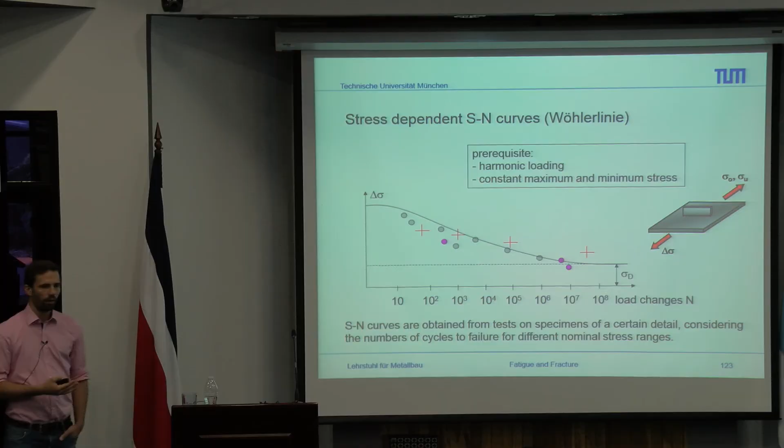So as I already said, you have here some different categories which are related to the cycles. The low cycle fatigue is here related from 1 to 10^2. It can be due to some different assumptions, or materials also go to 10^2, 10^3, 10^4, 10^5. The high cycle amount is defined from 10^2 to 10^7, and the endurance limit at the end is 10^7 until infinity. This is what we're talking about today, more the high cycle fatigue area.

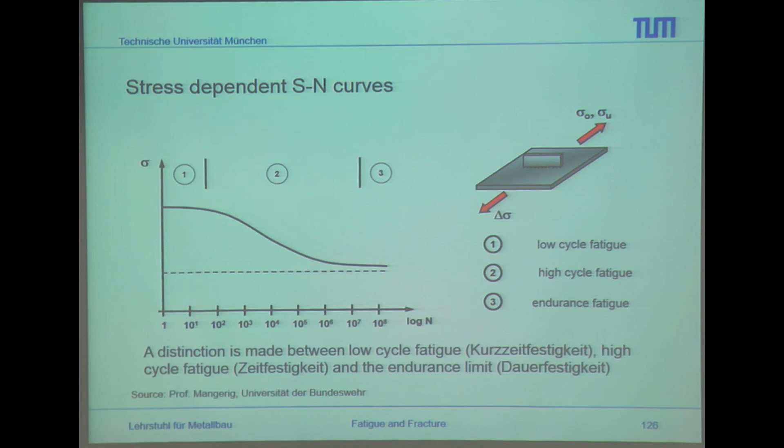So where we have here the linear line, and we can investigate some first steps at this part. Then also some information due to the endurance limit.

The endurance limit is a part where I already explained before that it's usually a stress range where you say, okay, you have no damage on the microstructure, and so no damage which occurs due to fatigue and fracture. But at the end, reality is not as easy.

So we have here different lines which are defined, and these different lines are somehow shown here. The easiest one is the straight line, which at the end leads to the intersection with the x-axis. Then a second one, mostly used in the design codes, is related to a change of the slope in your system.

And the more tested part is the endurance limit, which has here the horizontal part. This is more related to the testing procedure, why it usually occurs by sinusoidal loading. If you go more for multiple loading, then this change of slope is more realistic and leads to a more realistic estimation.

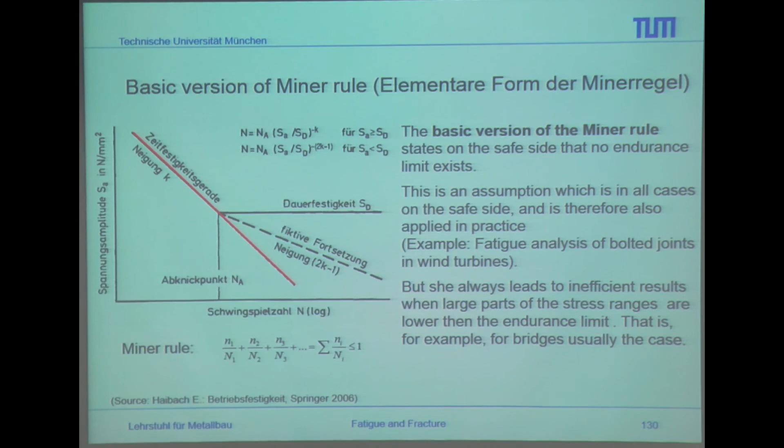This is also something we're gonna work on in the second session. So how does it look like? The easiest assumption, the straight line, is the basic version of the Miner rule - just the elementary rule, to give you the words and the explanation. So the elementary form or basic rule is always the straight line.

The original form of Miner is the part with the horizontal line by 2 times 10^6. And the modified minor rule, which is induced by Mr. Haibach, is here with the changing of the slope. This is more related to different load shapes and different loading assumptions.

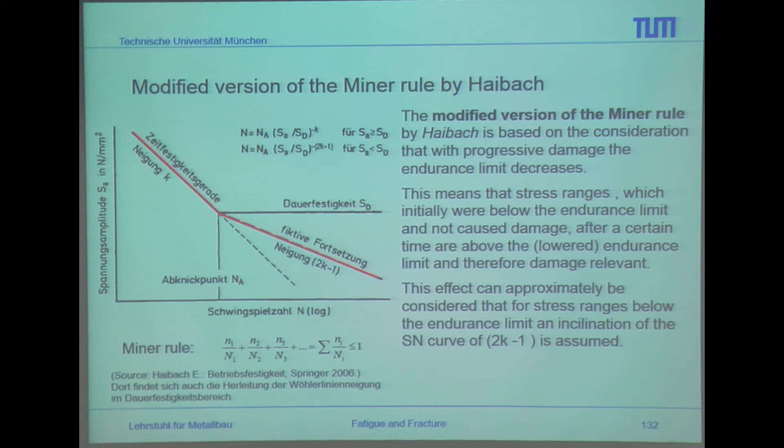The slope of the resistance curve is defined in a double logarithmic space. And therefore we can calculate the resistance from 10^4 to 5 times 10^6. From this part, we have a change of the slope with an increment of 2. And after 10^8, we have a horizontal line, which is the endurance line.

And this is also the cutoff limit. So if we have, for example, stresses which are beyond this value, you can just say these values are not important. You can skip them also in the investigation of your load on your details.

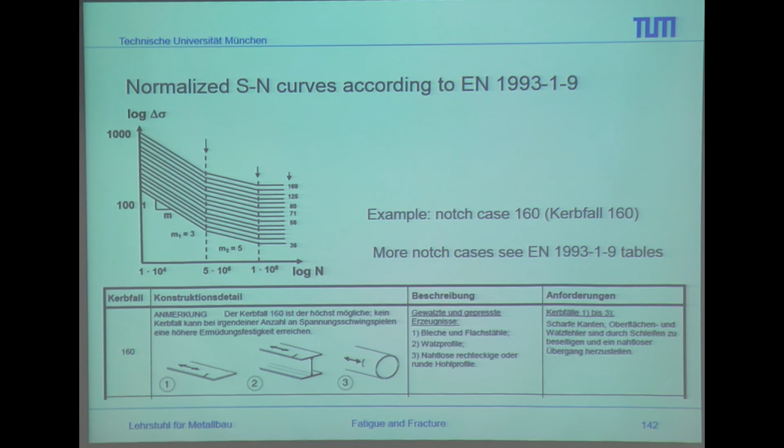And next we have to define our notch details. The notch detail is defined by the amount of cycles at 2 times 10 to the 6. So the notch detail gives the amount of cycles you can handle. For example, for bars, hollow sections, and plates, usually you say this can handle about 160 MPa. So which notch cases do you have, for example?

And these notch cases are always depending on the constructive details. So you separate based on the constructive design, the details, and you say, okay, your beam has a stirrup, it has some welded part, it has some attachment or something else. So you go through your welded beam or something else and say, this part is related to the construction detail like this. And so the nominal stress concept gives you the amount of cycles which can be handled at 2 times 10 to the 6.

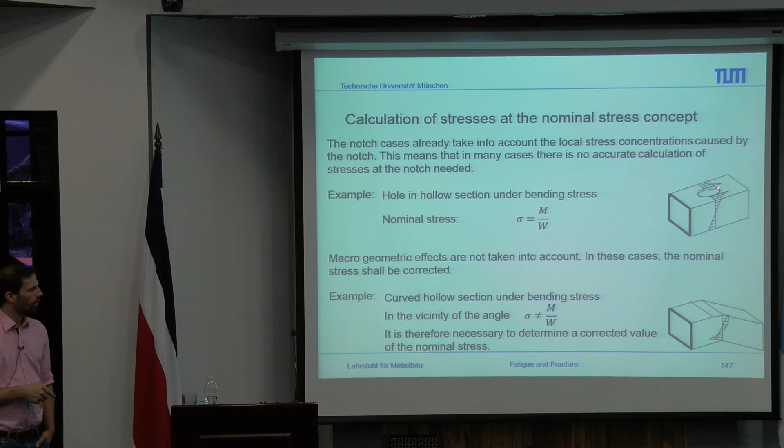So, for example, if your detail usually says you have a hollow section without a hole, then you cannot take into account this hole in your fatigue design. There's no sense doing an assessment based on a testing which is not related to the detail. So you have to calculate the stresses in the nominal stress concept, and afterwards apply a stress concentration related to the hole. So you have to increase your nominal stress and then go with the increasement of the stress range into your fatigue design. Okay.